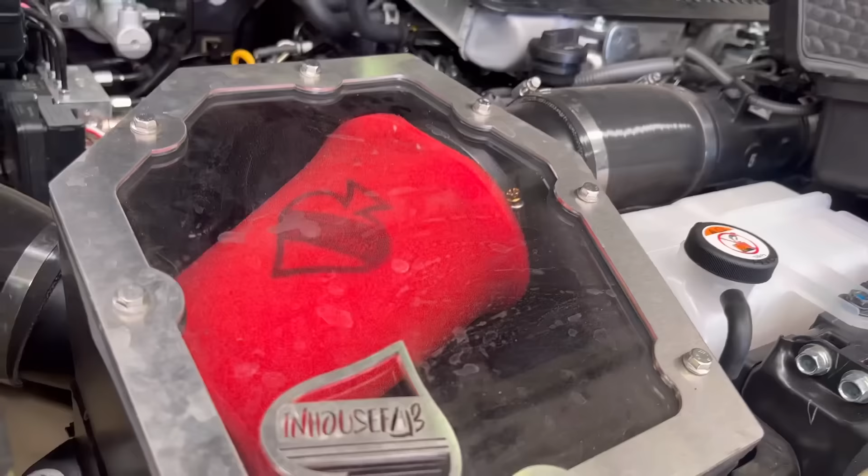But over here we have some goodies. We have some plus 30s to go in. Injectors aren't too bad on these newer ones, the older ones can be a bit of a pain, you've got to pull the rocker covers off. Newer ones, we just undo some bolts holding it in, undo the return rail, undo the feed, and pull the injectors out. So I'll get stuck into that. I might do a bit of a time lapse on this side so you can see it, and we'll get them ripped out and new ones in.

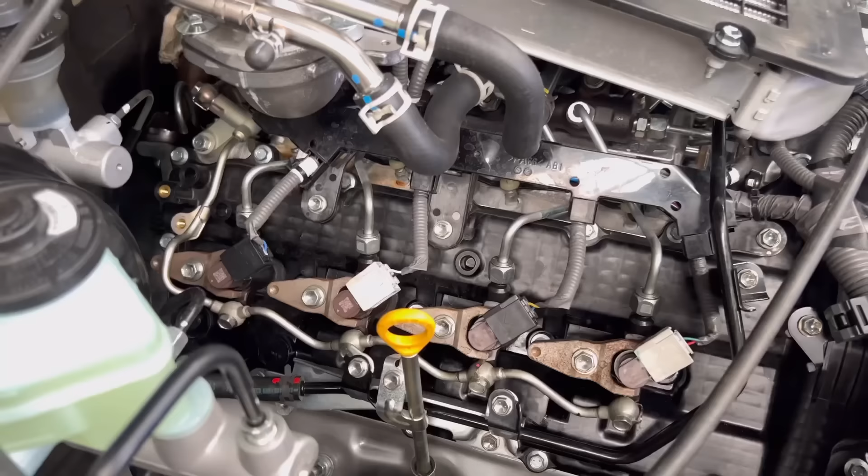All right, so I've got the plus 30s in. We've got the calibrations all in, so every injector I have to calibrate into the ECU. I've put all those numbers in, so we've got that done. We've got pilot learning done as well, so it'll idle and know where it's going with everything. And now let's let it warm up and we can start playing with the tune.

So we did a bit of a baseline run there with some basic info in the ECU. Now I know where we're at, what we're going to play with. I'll spend a little bit more time now doing this tune and I'll get straight back to you.

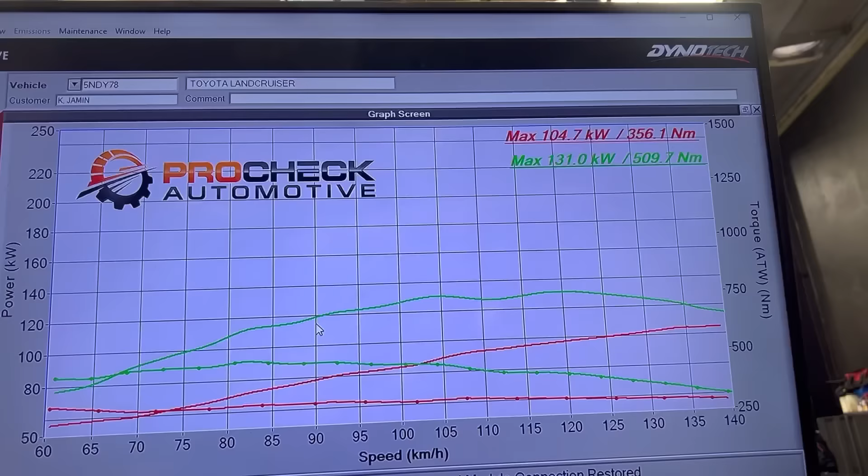Not so bad. We've got 130 kilowatts and 510 newton meters of torque. That's on 37-inch tyres with just an exhaust and a snorkel. It's not bad, but maybe we should have a look and see what else we can do.

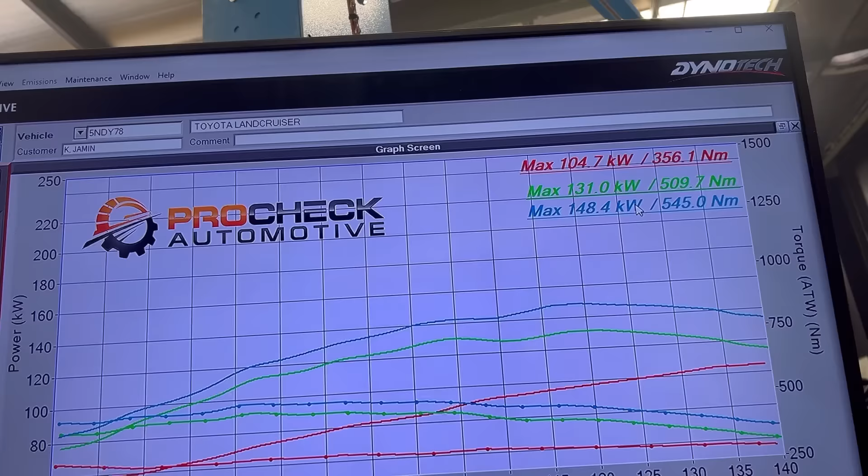Oh, that's cool. We just picked up another 40 odd newton meters of torque and another 17 kilowatts. Yeah, not so bad. I think we've got more in this thing still.

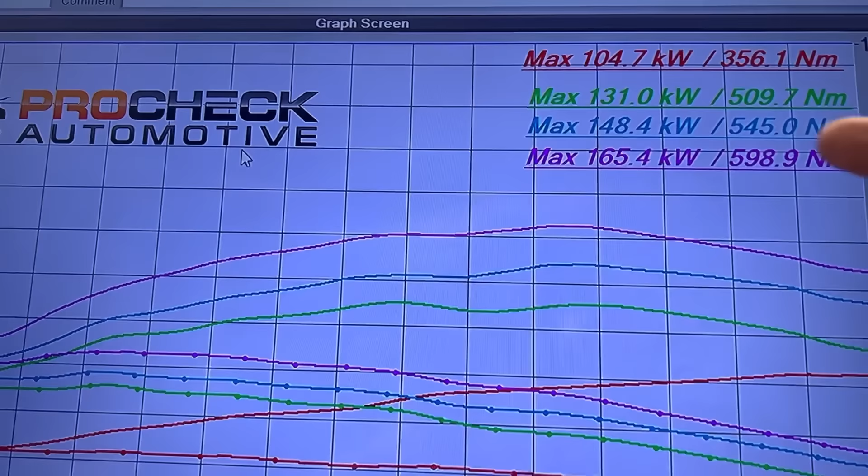All right, so we got a little bit more out of it again. Is there more? You need to ask yourself, is there more out of a Landcruiser? I don't know, let's just have a look up here first. So we have the factory 104, 105 kilowatts. We've got a little bit of a 131 jump, then a 148 jump, then a 165 jump. Now we're cracking almost 600 newton meters of torque here. You can see the curve's really, really good and we're making heaps of torque.

Our temp here at the moment is about 21 degrees, so it's a little bit cool inside. So on a hotter day, it'll probably make a little bit more.

Speaking of more, surely there's more. Jarvis, is there more? There's always more. There's got to be more. Let's have a look. What we got around here? Not bad, it gets better. Oh, you want it slower? We can do it slower, but it's fast as well. But you want more? Do you want more, Jarvis? There's still more. Well, how about we do this one?

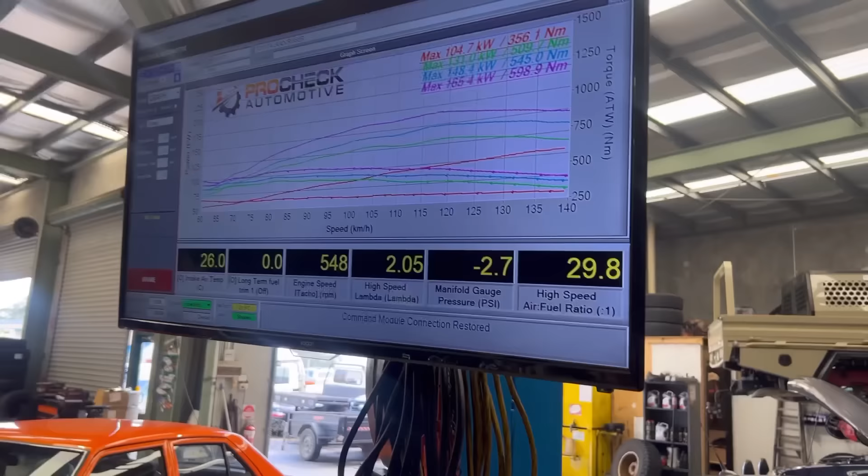But do you want more? You gotta say yes, Jarvis. There's always more. Let me change the screen on my dyno and I'll show you what else we can do. All right, so you can see there that negative 2.7, that's our manifold pressure. But let's see if we can have a look here.

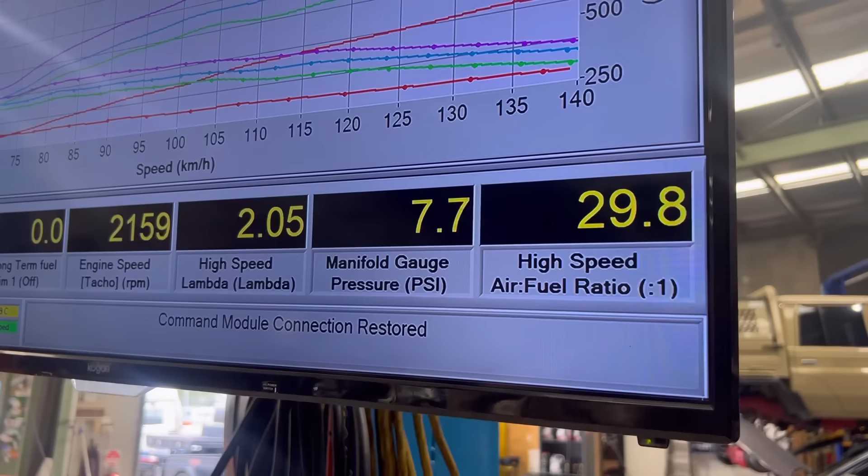I know you want more. How's a launch control sound here with a hard limiter at 2.2 grand in valet mode? How do we do all this? Come over here, let me show you.

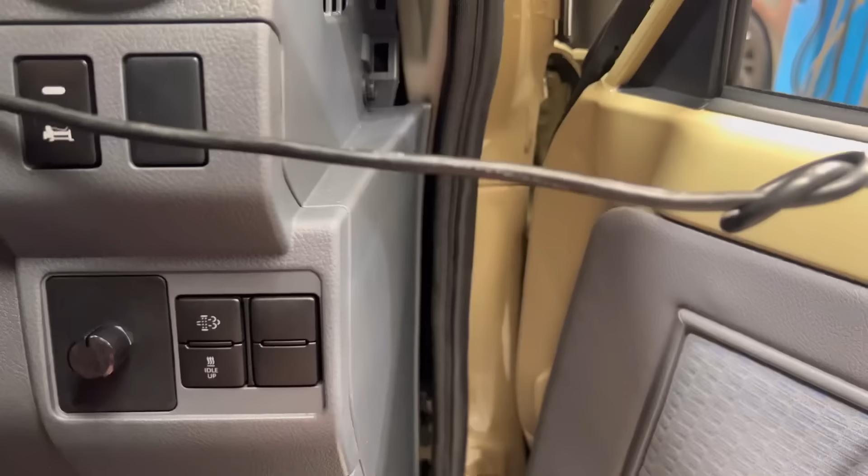We have a switch, that's right. We now are doing the map switching for Land Cruisers. We have 6 different modes and they all do different things. And we can change everything all through this to suit. And there's a cool bit of kit. This is truly an amazing offer.

That's right, we're now doing map switching for Toyota Landcruisers. We are going to be looking at other models as well. We've worked this one out, so let's have a look at the other cars as well in the future. I've got a list of cars that want to come and see me for it.

But what we have is map switching with 6 different maps. Well, 3 different maps, but we have your stage 1 tune, which we're going to basically call your tow tune, your cruise tune. It's a little bit lighter on the fuel, so you can just cruise down the highway and have good fuel economy out of it. The stage 2 tune, we call it, is a little bit more power out of it. And then we've got the stage 3 tune, which is balls to the walls, sooty boy. And then after that, we have that stage 3 tune with a hard limiter.

And then we can go back the other way and we have the valet mode, or what we'd like to call a launch control mode. So basically you can hold that thing, it'll make 10 pound and you can drop the clutch and have some fun with it. But at the end of the day, it's just a bit of a fun factor. Don't recommend it if you're gonna break your axles or gearboxes like Mac.

And then in the last stage, we have the Lope tune, and we have that customizable as well from slow to fast. So we've got a bit of map changing going on there. I've got a sticker coming from that switch.

We're just going to work with Jamin, the owner of this truck, on what he wants to see and how he wants it to look. But we think it's a cool looking switch. It works really well. The map changes are all there. You can do it on the fly. This is taking me a little bit of time to get nutted out. The Hilux has been put on the back burner for a little while, trying to get this thing nutted out.